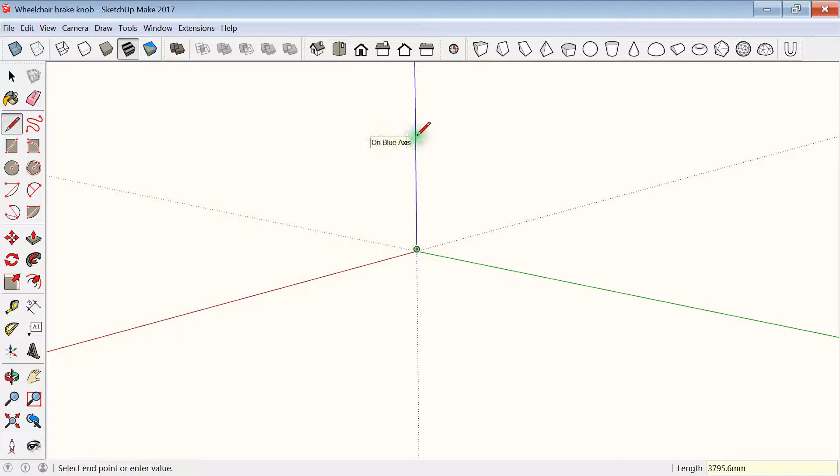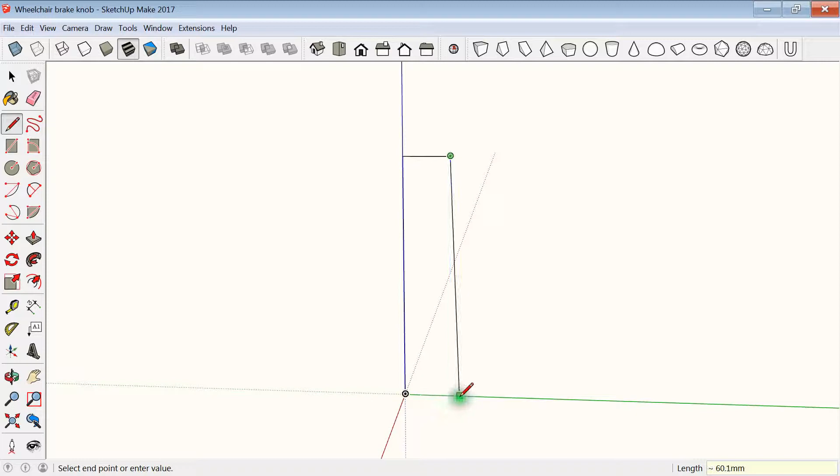And the original is about 60 millimeters or a little less, so I'm going to make it 60 millimeters. And then it's about 23 millimeters in diameter. I'm going to come out on the green axis by pressing the left arrow key. And I'm going to come out 11.5 millimeters. And then down to the green axis and then back just to make a rectangle.

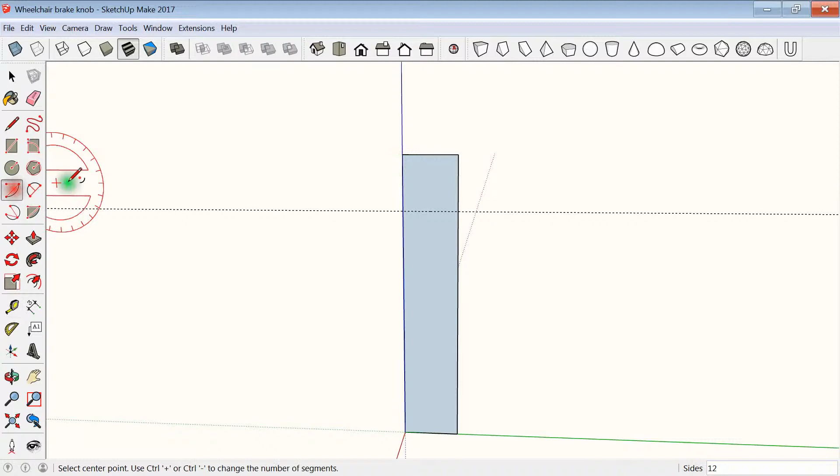Okay, I'm going to round off the top corner to make it a half round dome on top. So to do that I need a guideline, 11.5 millimeters down, and the arc tool, and take the corner off, and then erase the outside edge. Okay, next I'm going to select it all, and then lift it up a little bit.

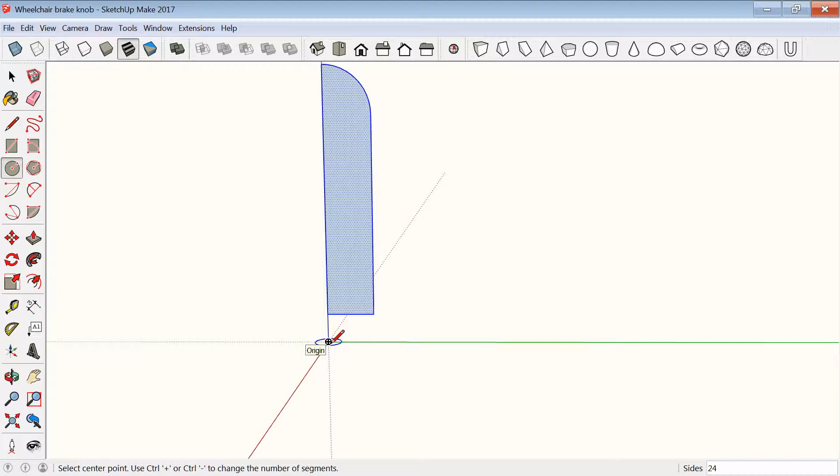Then I'm going to draw my circle underneath. I'm going to use the up arrow to make it snap to the blue axis. And then again, coming out 11.5 millimeters. And that'll be fine. Now, I'm going to make it slightly oval.

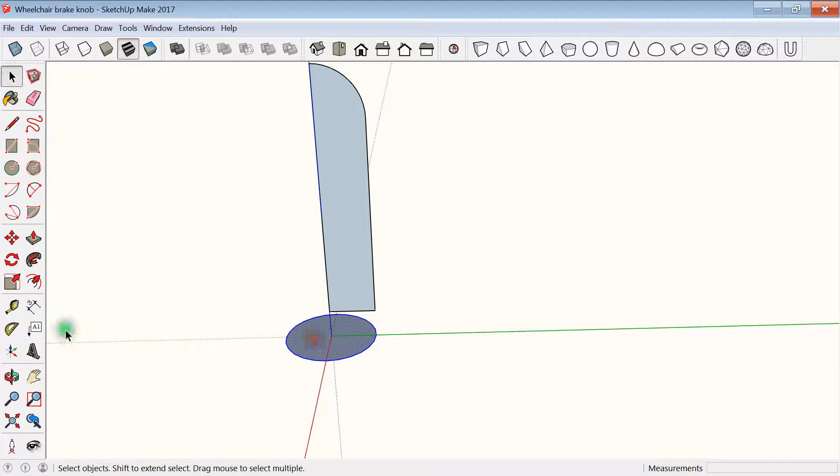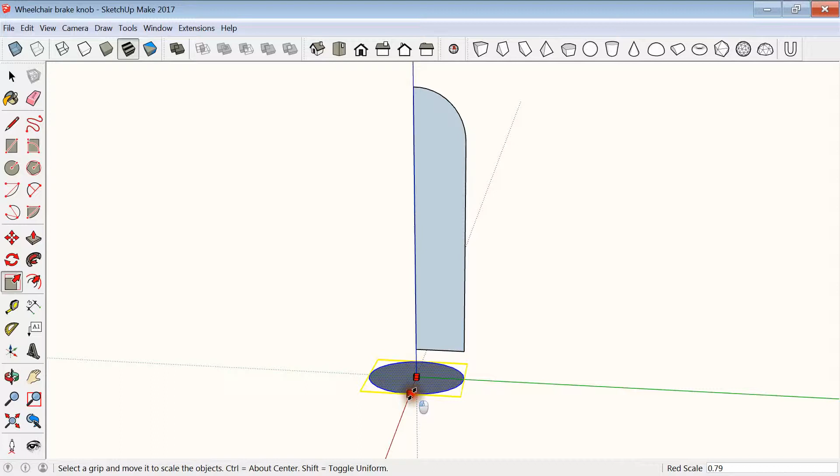I'm going to triple click on the circle to select it all, and then the scale, and then on the red axis I'm going to scale it down to make it a little bit of an oval. So holding the control key, I'm just going to push it in to about 80% or somewhere around there, just to make it a bit of an oval. Now, sometimes when it's this small, it has a hard time with the geometry of curves at the top.

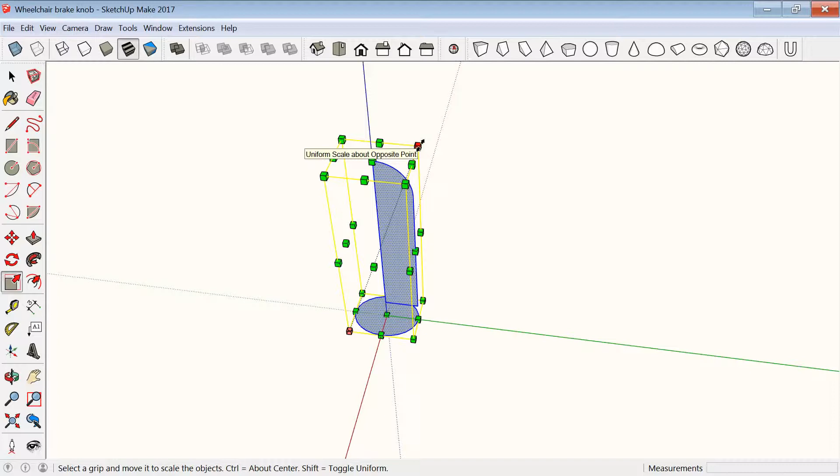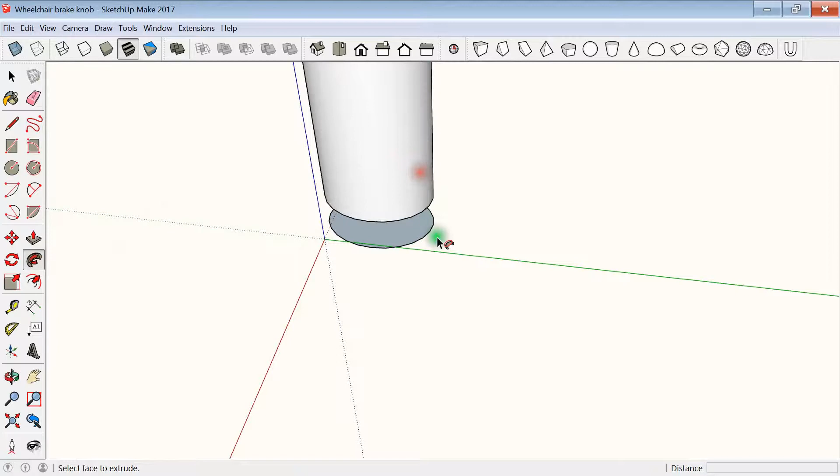So I'm going to select the whole thing and scale it up 10 times for just a few minutes. So clicking on one of the corner pieces so that it's a uniform scale, I'm going to start drawing up and then put 10 and enter, just to make it huge. Now, clicking the outside of the base of the oval, and then the follow me tool, and then click on the face. It still has a little bit of an odd edge, but I think it's going to be okay.

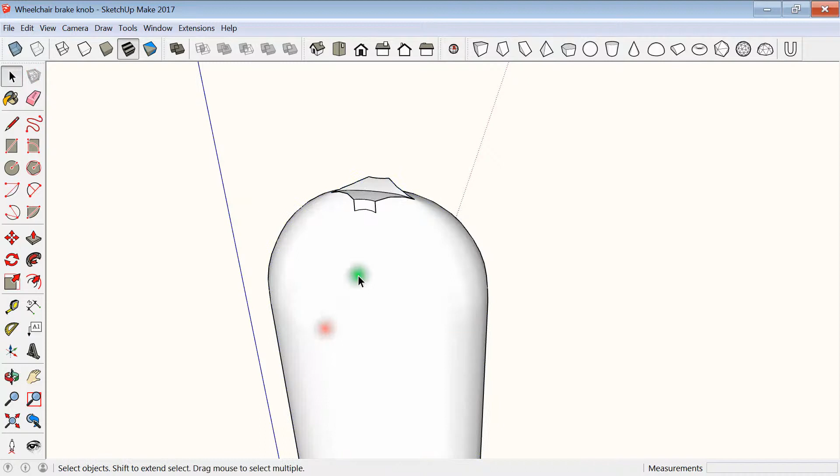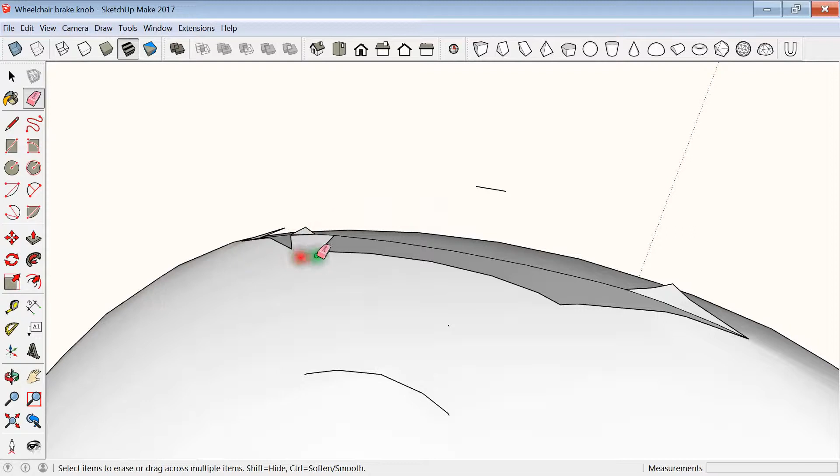So I'm going to select everything, then right click and intersect faces. That should allow those areas to be cleaned up. And I'm just erasing the extra pieces. There's probably a much better way to do this, but I don't do these enough to worry about it. So I'll just clean it up by hand real quick. Just using the eraser tool and erasing the extra piece of geometry that I don't want.

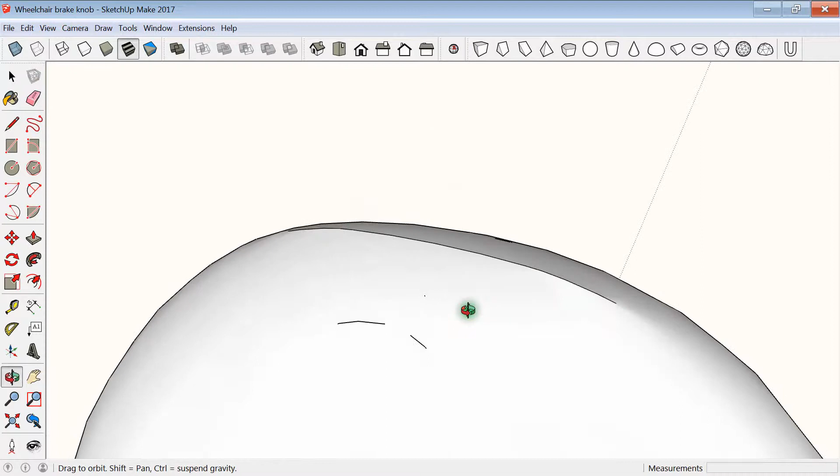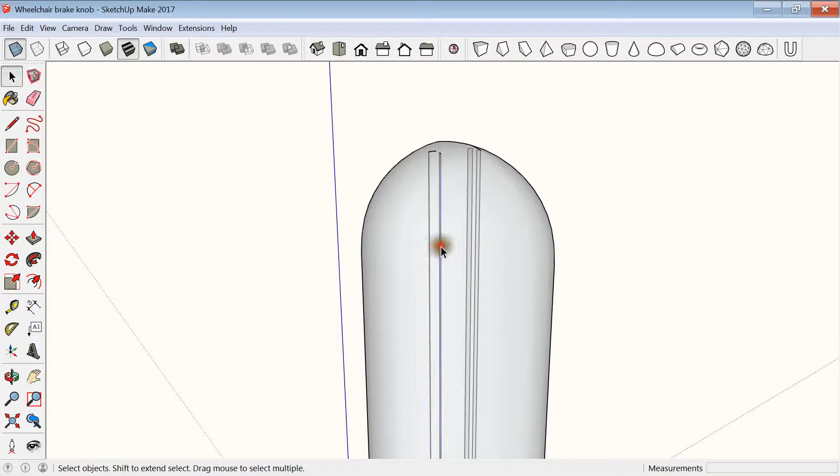Okay, let's look at it in X-ray mode. It's got a few extra pieces in there still. So let's see if we can select those from outside. Yes. So I'm just selecting them and then deleting. Whoops. Just being careful not to select the whole thing.

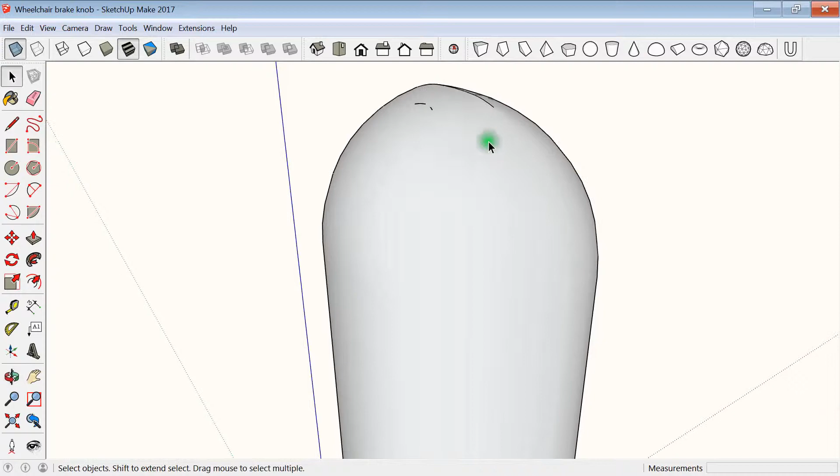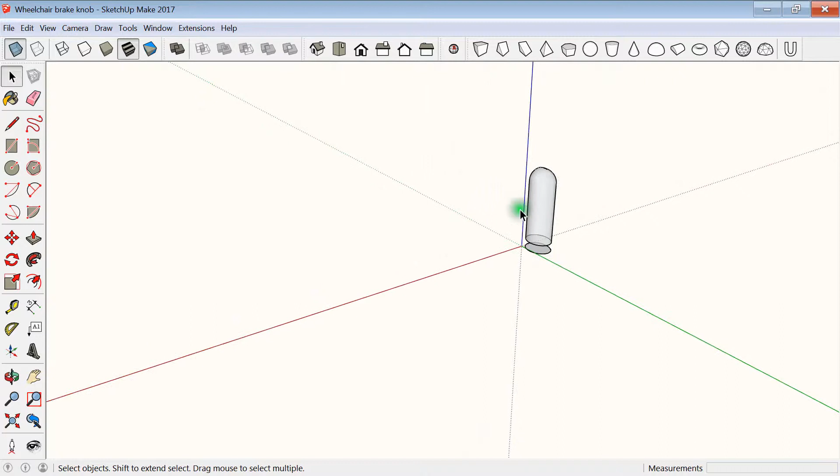Okay, and then the surface border, let's find out where that's at. So I can find that out by clicking on it, and then the up arrow, and then enter. And of course it's the bottom, the base piece. Okay, that's fine for right now, because now I'm going to shrink it back down. By going the opposite direction, start pushing in, and 0.1 and enter. And then zoom extents.

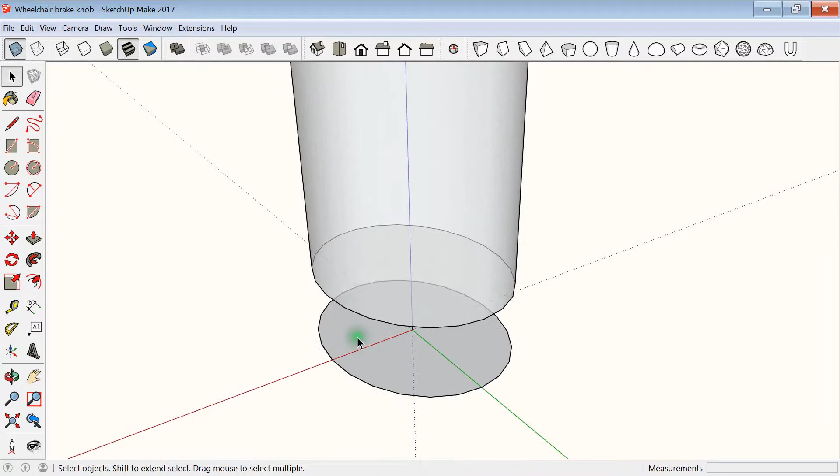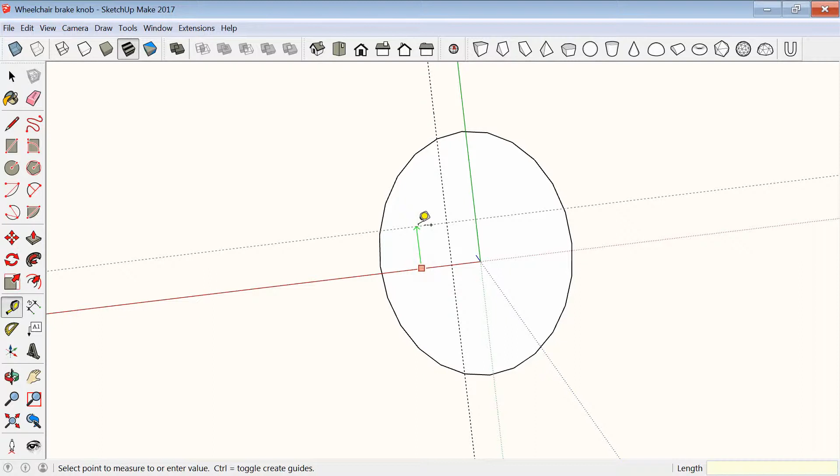Okay, now I need the rectangle hole. So we can get rid of this bottom piece now. I need to make the rectangle, it's 4.9 millimeters by 13 millimeters, 40 millimeters deep into it. Tape measure from the green line over. I'm going to go 2.4. Okay, let's try that correctly. Go over 2.4 and enter. And from the red axis, going to come up or down, it doesn't matter. Half of the 13, so 6.5 millimeters, and enter.

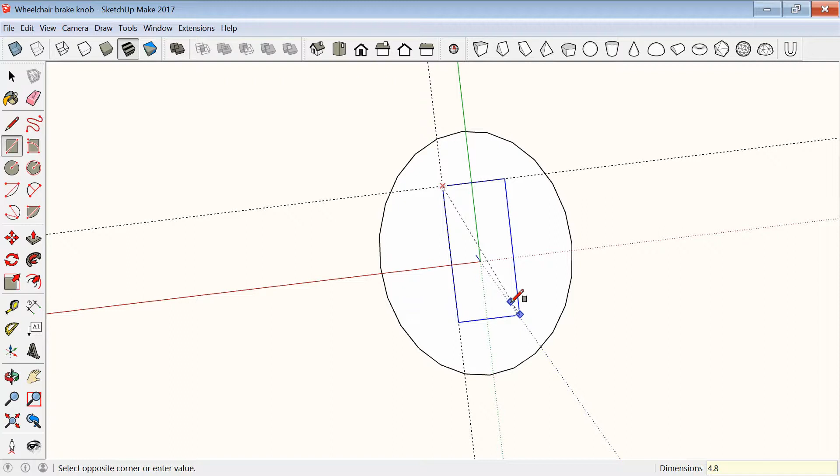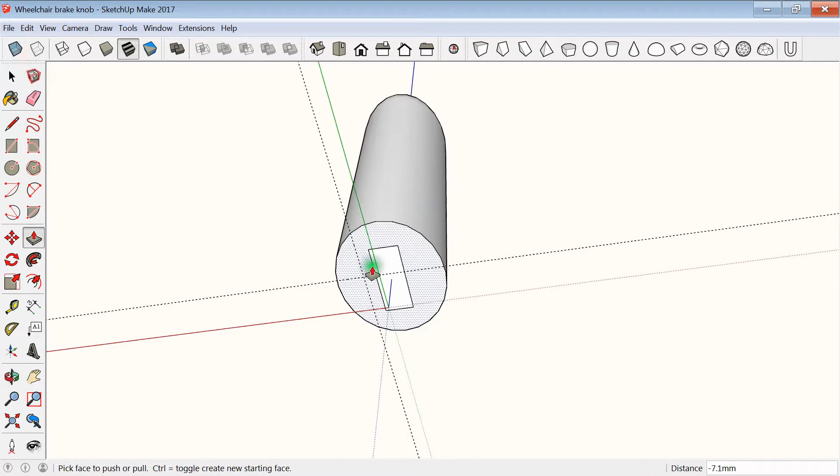Now with the rectangle tool, start at the intersection we just made and start pulling diagonally. Hit the up arrow key to lock to the blue plane. Start pulling across, and then I'll type in 4.8, comma, 13. And that'll give the rectangle. Now with the push-pull tool, you can just pull it up until it hits the face. I'm going to do the same with the bottom of it. Now it should just have a square or a rectangle at the bottom of it. Now the push-pull tool again, and then push it up 40 millimeters, enter.

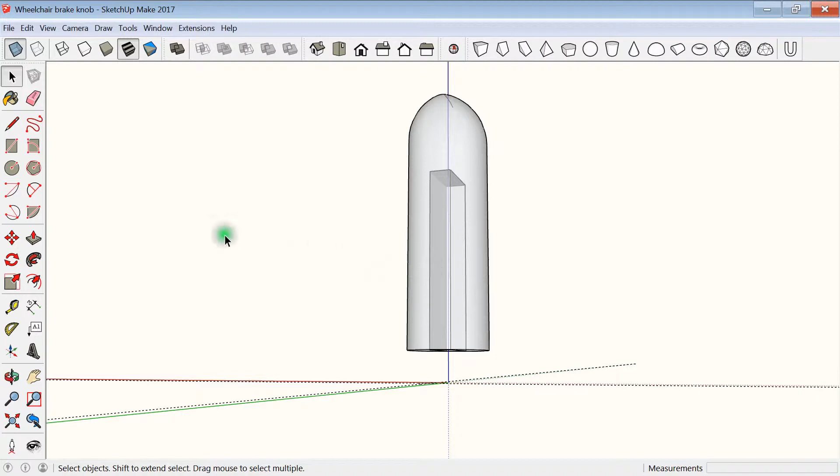So by printing this with a flex material with a low infill, that should give it some give and flex and should fit it nice and snug. So last I'm going to do the solid inspector and the cleanup tool, and everything looks good. Get rid of the extra lines, and finally save and export. So save, then export as STL.